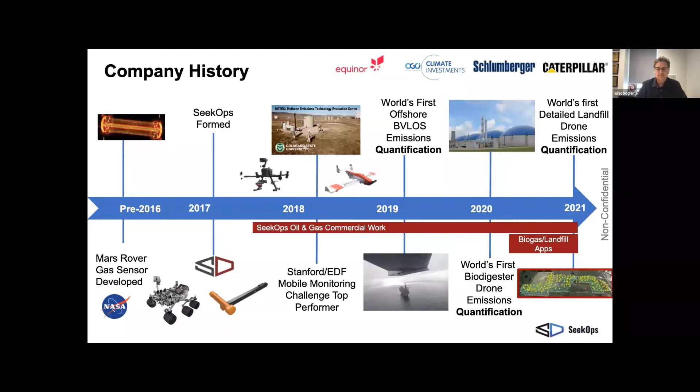The technology itself is a tunable diode laser tuned specifically to methane molecules, part per billion sensitive, and where and how we measure leads to around 2 hundredths of a kilogram an hour detection threshold when it's placed on a multi-rotor drone, which, as you can imagine, can get quite close to sources, obviously outside of any explosion-proof or intrinsically safe zones.

And then offshore with the fixed wing, because the fixed wing is a little bulkier, and we're certainly sensitive to the whims of the operators there in terms of staying distant, being unobtrusive to operations. We're a little further away, so the detection limit is about 2.5 kilograms an hour for that offshore. The units are self-contained. They have their own power, communications. They are very low power, so less than 2 watts complete, including the LiDAR as well that we use on

the multi-rotor for height. A lot of the engineering effort that went into the commercialization of this technology has really been to put it in rugged environments, high vibration, hostile, wide temperature range environments that typically optics don't like. Again, I think one of the benefits from coming from an engineering background like that of Schlumberger is a focus on process and technology development to ensure ruggedization, consistency in the field deployment and workflows.

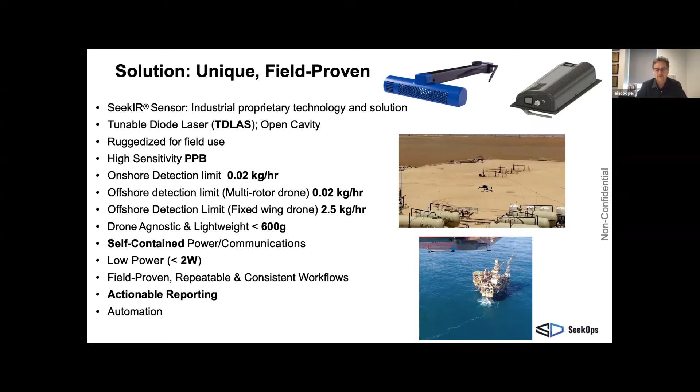And realistically, the DJI M300 is our drone of choice, but because of that independence on power communications, we are drone agnostic. But we keep a very close look on the automation capabilities and enhanced automation capabilities of these enterprise-grade drones so that we can leverage them.

We are also looking to put a BVLOS waiver for this site so that we can actually have a remote control center for the drone and prove out the beyond visual line of sight capabilities for the multi-rotor work, which will certainly enhance multi-pad capability for US land operations. And then also allows us to do a number of different things. So again, I think I have a little animation showing how we cleared the land. We've left it fairly complex with a few trees in place as well, so that we can have some hazards.

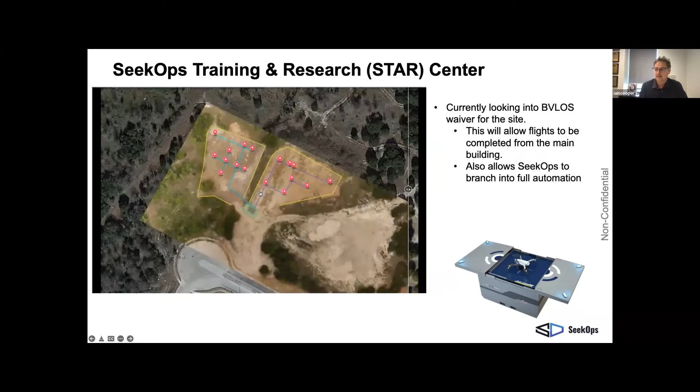This is also going to be a training center for pilots. Our business model is to partner with third-party drone service providers, train them, and then essentially let them deploy the sensor on our behalf. The flight paths we have are not difficult, but they're subtle, I would say. And again, I've got an example of that coming.

So again, this is the test center. It's going to have 17 release points. This was a photo from about a month ago. We've all, as you might imagine in a startup company, mucked in to help clear and set this out. We're going to have metered releases, but it really allows us to train, have videos for training, do customer demonstrations. We'd certainly love to put some long-term fixed sensors on there as well.

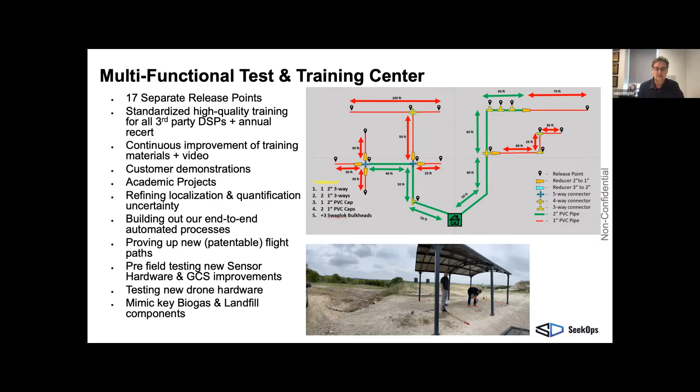It really helps us accelerate technology development, but realistically, more importantly, make sure that everybody that's going to be deploying our sensor is trained to the same standard as our own pilots and really understands the subtleties of the markets in which we deploy and the complexities, and lack thereof in some cases, of the flights that we do. And again, continue to build out the end-to-end automated workflow so that from invoice to report, the aim is to be fully automated. And again, this is a site that, offline, we can certainly discuss with Stanford the potential ability to use as well.

So we're in 4 markets today. Again, conventional oil and gas is the first of these. Traditional onshore, offshore, midstream. We've looked at and have done some test flights on P&A wells. Getting anyone to pay to look at some of the issues around P&A, frankly, has been an issue. And as a growing startup, we don't do anything for free anymore. But realistically, we'd love to certainly do a more in-depth study around the leaks from P&A wells.

Again, the sensitivity of our sensor lends itself very nicely to what we would expect are smaller leaks from those kind of wells. And again, I've got a little bit more detail on onshore and offshore. We've got four reasons people contract us for services. Again, the obvious ones are leak detection and repair. We call it leak detection and quantification as well as repair. We have partnered with a number of companies that do the downstream repair side of that contract, so that we can offer an end-to-end solution to the customer as well.

For the offshore, typically the interest has been around the platform asset level top-down reporting. And again, I think there's been a number of publications that you've probably seen, particularly around the work we've done with BP on that side, to compare bottom-up and top-down, and the differences that we see behind those numbers, which can be quite interesting in some cases. I would say offshore, the leaks we've seen tend to be a little smaller, as you might expect, particularly in the North Sea, where there's been fairly long-term scrutiny around emissions.

Rather than showing some schematics, and again, I'm hoping bandwidth works fine, I'll show a little video of a typical operation now. And I know Bob's certainly seen this before, but this is a fully automated survey. There's no one flying the drone here. This is a top-down view on a well pad in the Permian. We've actually got another drone above that's doing the filming. So the second drone there you see is just the shadow on the first. It's a very still day. And here we're doing orbits around, again, the wellheads here. The operator was quite surprised to see how dirty his wellhead was when he saw the video here.

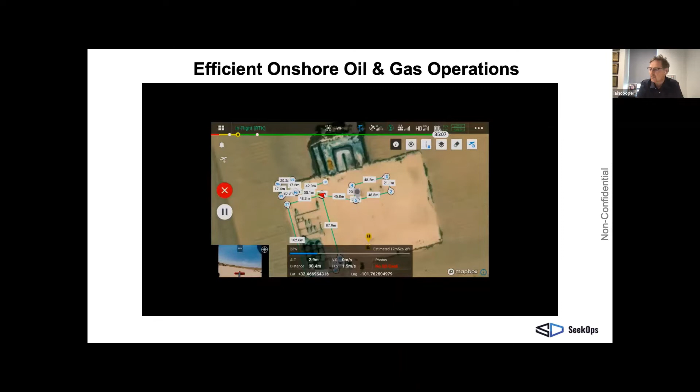And then this is the point of view of the drone. And again, this is all done using the real-time kinematics of the drone. So these have been waypoints essentially programmed in consultation with the operator on how they want their equipment groups monitored. As you can see, it moves quite quickly. It's very efficient, and certainly for us, from a leak detection, repair, and quantification perspective, it's very repeatable. Typically, when we go to an operation like this, we'll also set up high-resolution orthomosaic maps, which also enable us to use things like terrain following, but also give us detailed contextual information around the equipment that's on site at that time, also knowing that can evolve over time.

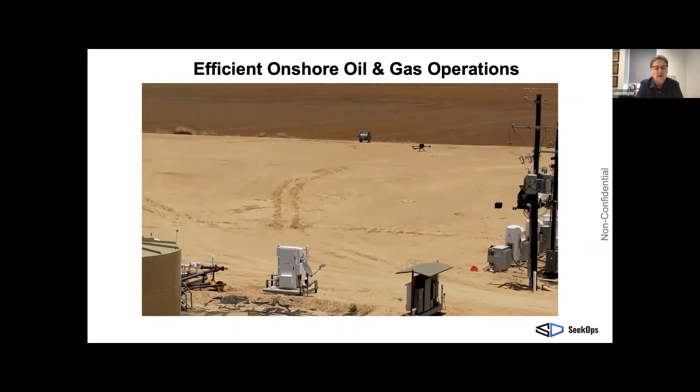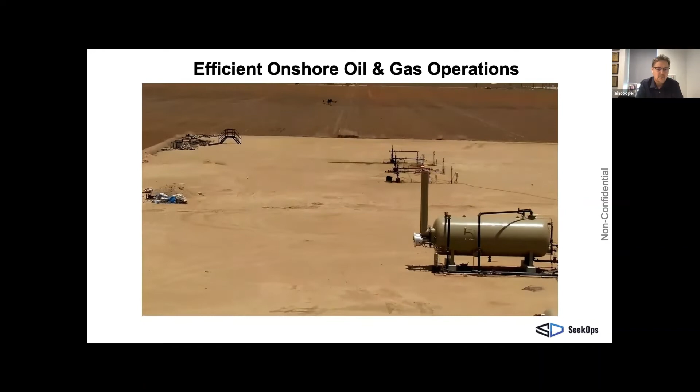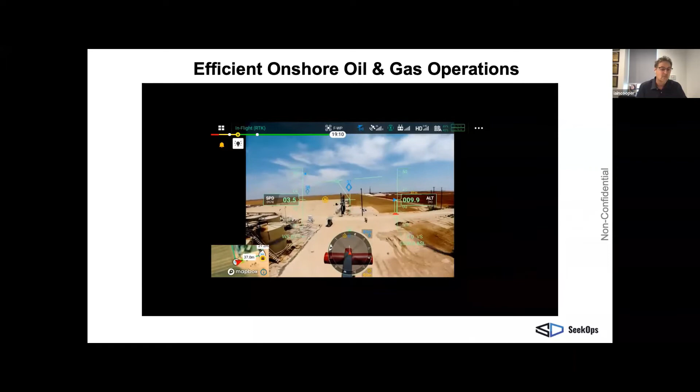The drones can typically fly in a light rain, but not heavy rain, because it's an open cavity sensor. We tend to get some fouling of the optics, as you might imagine. So we can certainly operate in a light rain. This is a typical data acquisition speed. We're acquiring data at 10 hertz while we fly. We're actually doing it a little faster, but we downsample to 10 hertz. It's very smooth, it's very efficient, and it's very unobtrusive. These enterprise grade drones are louder than you might get from Best Buy, but they're still really not very obtrusive at all from a noise pollution perspective either. One of the biggest issues we thought about from the biogas sector is, would it spook the cows? And cows being cows kind of look up once, wonder what it is, and then go back to eating.

So what comes out of that is a map like this and a report like this, where we'll highlight the variation in the wind and the enhancements that we've seen around those equipment groups. Typically the operator is wanting to have the equipment grouped together. On a good day, we might be able to find a leak from an individual component, particularly if it's something like a thief hatch left open, or a very obvious leak from a separator or a wellhead. But typically we group it by equipment group. And depending where we are, we'll give it in standard cubic feet per hour or kilograms per hour. We don't overfly any equipment. One of the benefits of the drones is that we can make sure that we don't overfly equipment or personnel.

We typically take a measurement of the background. As you might imagine on a biogas site or an oil and gas site, you do have an elevated background. And so, because of that part per billion sensitivity, we're looking at enhancements above the background. So we fly, whether it's downwind curtain patterned interlaced curtains or orbitals at interlaced heights, and we can get the high resolution curtains around the equipment by which we can ascertain and triangulate essentially where the leak is coming from, and then convert that to the leak rate with the wind.

Right now we have an anemometer on location, but we're starting to use wind on drone measurements as well. As you can imagine, having GPS, wind, and concentration on location helps refine that uncertainty even more. Occasionally we will revert to manual mode, particularly if we've got widely ranging wind directions changing significantly during the acquisition time. For a site like this, typically to set up, do the orthomosaic imaging, and then do the survey setup and survey is about an hour.

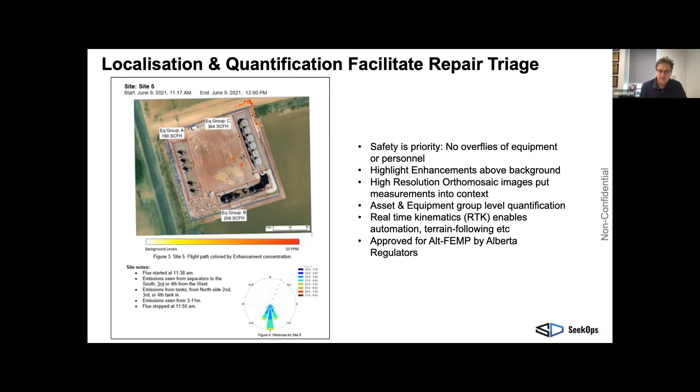But it says emissions limitation in the EPA equivalent of that. We know EPA is kind of on hold while they're looking at the new regulations, but emissions limitation is not straightforward. So we had a Permian independent operator have us fly an automated repeat survey after they effected the repairs. It took 3 months for the repairs. As an operator, they've been very open. We actually have a paper accepted for the SPE ATCE, where we'll talk in more depth about the workflow and the subsequent events here. In most cases, the repairs were effective, and we did see a significant decrease in emissions, as you can see on the table here. But in some cases, when we went back, we saw significant enhancements as well.

We typically take detailed field notes. We know that contextual information and ultimately that unstructured data for things like machine learning will be important. So we recommend and train our pilots to take copious notes with keywords. And it was subsequently confirmed by the operators, yes, they had unlit flares on 2 of those sites. There's a number of studies going on now looking at flare efficiency. So context is everything. You can fix the repair, but if you don't light the flare, then your emissions could well be higher. So that operational context is really important, particularly on the land operations we've seen.

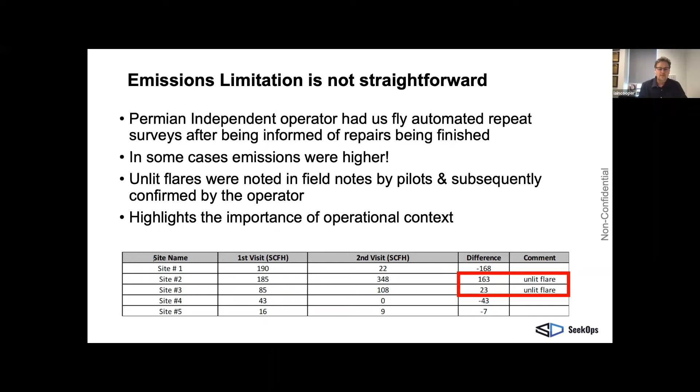If we move offshore now, we've got 2 approaches. The first is what we've published a number of times on the fixed wing. This is beyond visual line of sight, typically launched from shore, goes to the offshore platform, and performs what I call the beehive model. We encompass the emissions around the platform with that fixed wing plane, it spends about an hour on location, and then flies back. About a 600-kilometer round trip. Most of the work to date has been in the North Sea. I think we've done 6 operators, just under 20 flights to date there. We've already got about 120 flights scheduled this year, so that's rapidly growing and beyond the North Sea now. So we see this as a very useful technology at the asset level. But of course, people typically want more information than that.

So we've also been working on the deployment of multi-rotor drones, obviously much closer. In a post-COVID world, it's much more difficult to get onto a platform unless you're truly revenue generating. So we've looked at deploying from supply boats. There are some operators that still would like deployment from the platform itself. And certainly you can envisage drone resident systems being one of the long-term approaches here, particularly triggered by fixed or IoT sensors as well.

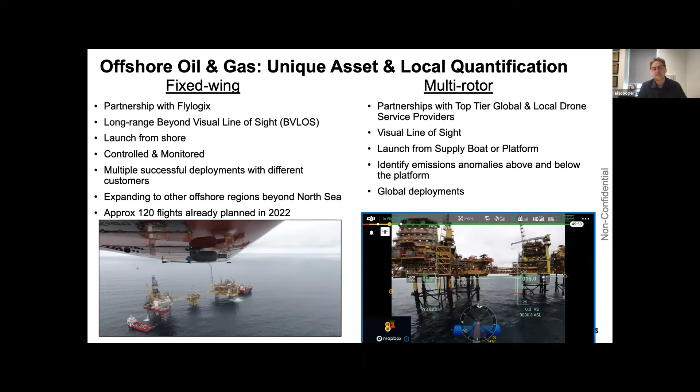In this case, we're doing it line of sight, launched from the supply boat. Here we can get a bit more granularity on potential leaks, locations, and in some cases, emissions above and below the deck level of the platform, which is quite interesting for things like cold vents as well. We've done this globally. And the more operators we talk to, the more they're starting to get comfortable with drones in the offshore environment, close to platforms.

So renewable natural gas is the other, I would say, second of the key markets that we've seen rapid growth in, and again, certainly sales cycles have been a lot shorter in the renewable natural gas market compared to oil and gas. What to me has been interesting here is that almost every part of their value chain has been leaking, and the regulatory thrusts have been perhaps not as focused on this area as they have in oil and gas and even landfill side.

And that was one of the reasons we reached out and wanted Harmen Dekker, the head of the EBA, the European Biogas Association, to really help us understand this market and its evolution. And certainly post Ukraine invasion, with potential supply restrictions in the EU, we've seen even faster growth and acceleration in wanting to build more biogas facilities.

So biogas, biomethane. So you may hear them used interchangeably. Biomethane is effectively upgraded biogas. Biogas is typically a 50-50 mix, or thereabouts, of CO2 and methane with a few other species. As you might expect, it comes from a range of organic matter, whether it's solid waste. We've done a lot of work on dairy farms. You can imagine wastewater as well.

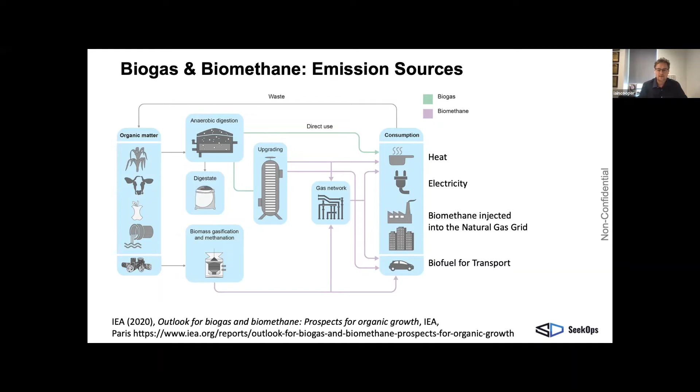I would say Europe is slightly ahead of the US, and I've got a little comparison on the markets here. Right now, there's about 2,300 operational biogas systems in the US, but there's rapid growth expected and being funded. Companies like Brightmark have had significant investment from Chevron. Most of the major operators are certainly experimenting or getting into this market fairly aggressively. And so it's really another string to their bow in terms of access to gas, but also access to the carbon credits that come with that as well.

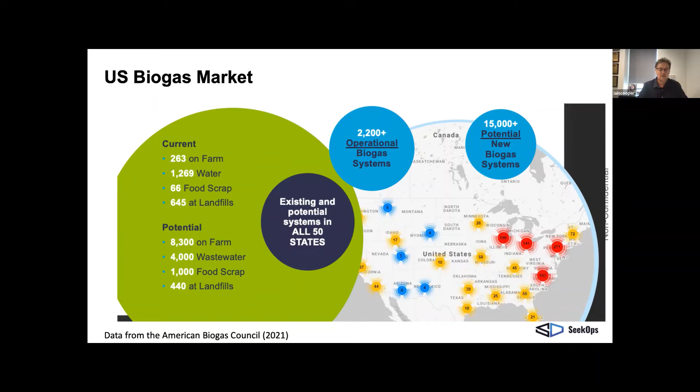So keeping product in pipe is incredibly valuable to any of the biogas producers. And they've previously done very little in terms of monitoring, whether it's optical gas imaging cameras, or just ensuring that the construction is built to certain emission standards. And in discussions we've had, post commissioning of any system now, emissions are going to be a key part of that commissioning, because any repairs can also be effected under warranty. So emissions will be an important part of construction in these markets, but will also be assessed across that whole chain, including things like the process digestate and ultimately how that's handled.

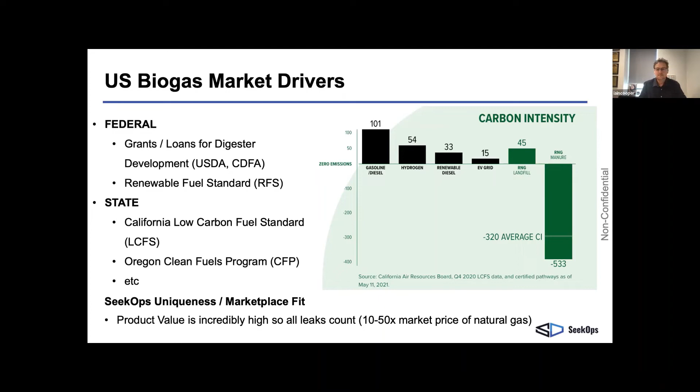On the EU side, they've certainly had a bit of a head start. There's about 19,000 biogas plants, I think 11,000 in Germany alone. And discussions we've heard around biogas growth are that they're going to continue to build. Expectations are that up to 40% of the total gas consumption will be biogas in the EU by 2050. So this is a rapidly growing and important market, and an important contributor in terms of emissions as well.

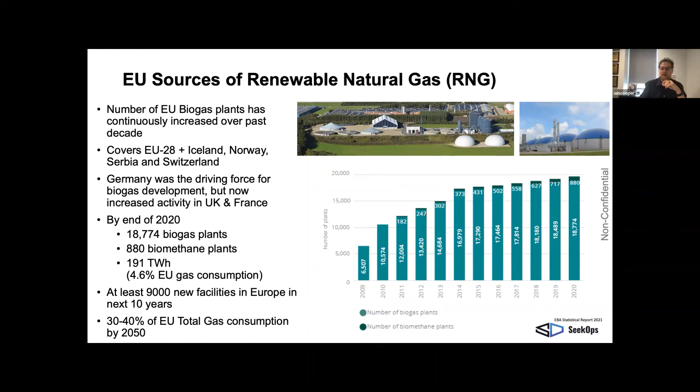So for a typical biogas facility, we do the same kind of approach: high resolution orthomosaic images, and then we look at the components. Obviously, the components are a little different. There's the pre-processing side. There's the digester.

In this case, in this image, this is a concrete digester. So that's this part over here. It's a flat concrete surface where, for want of a better word, the poop is mixed underneath, and the gas is then taken off, taken over to the gas upgrade system over here, and then the effluent is separated and put out into a pond here, which also emits methane quite significantly.

Interestingly, in this case, we actually found one of the leaks was downstream of the flow meter. So what they thought they were getting wasn't what they were actually getting. And again, with the drone, you can get quite high resolution here. This is a fairly small site, but not atypical for a biogas facility in the US.

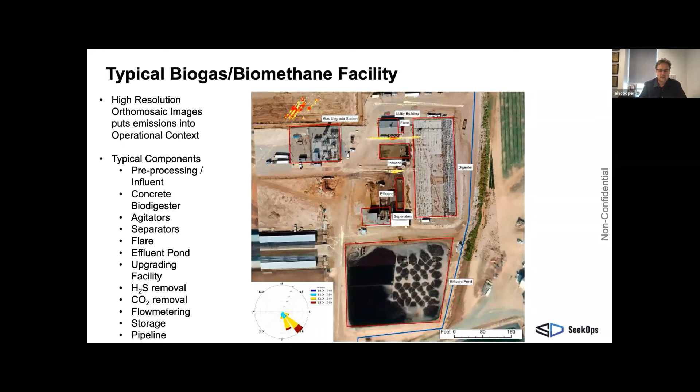Again, biogas is ideally suited to drones. I think I've got a little video here that shows how we go. Again, we leverage the automation. Again, all this is done in coordination with the operator here. Safety is paramount. So the first part of the day is all about the safety briefing, particularly on these kinds of sites that maybe haven't had the same kind of scrutiny or level of safety focus that oil and gas has had in the past.

We've done a number of sites now, US, EU. Again, every one is slightly different here. Certainly it's less cookie cutter compared to a set of well pads in the Permian, for example. Typically, again, it's leak rate and leak location they're wanting here. And in one case, we actually had to stop them following us around with a wrench to try and fix things behind us as we spotted the leaks, just so that we could get at least that site level quantification.

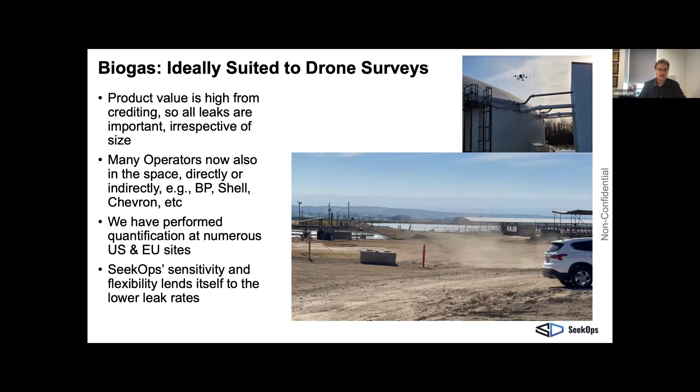The rates tend to be a little lower. I think the leak on this site was about 50 scfs per minute. So again, not insignificant, but certainly smaller than typical large-scale oil and gas operations. As I mentioned, we get leaks from almost every part of the process.

So here again, this is a concrete digester. What happens is you tend to get methane that bubbles up underneath the concrete. And so you get these little blisters, and then the gas comes out right there. And so we've highlighted again some of the leaks here with the orange flares coming out of those blistered leaks that we've seen here.

In this case, with a hot zone approval, we actually went in very close, took the sensor off the drone, and used it in handheld mode. Again, it's important to get that hot zone waiver. It's a very low powered enclosed device, but it is not intrinsically safe. But the operator felt comfortable enough letting us effectively wand some of these issues.

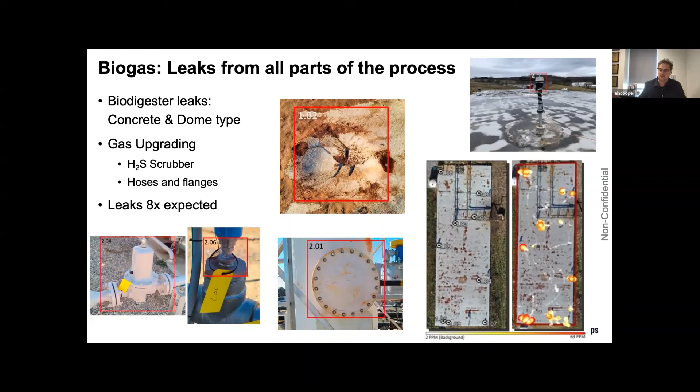So again, we saw the H2S scrubber leak, many hoses and flanges, and again, their expectations were dashed, frankly, and we found the leaks were about 8 times higher than they were thinking. And again, broadly across that whole workflow as well.

Again, not insignificant. This is another example where the effluent itself was only just above that of the biodigester in terms of leaks. So the leaks here are in the order of hundreds of scfs per hour. If you compare that, these are the kind of leaks that you'd certainly see by satellite as well. So pretty significant.

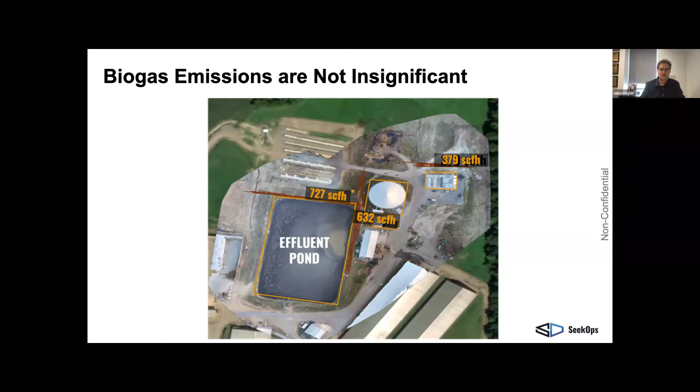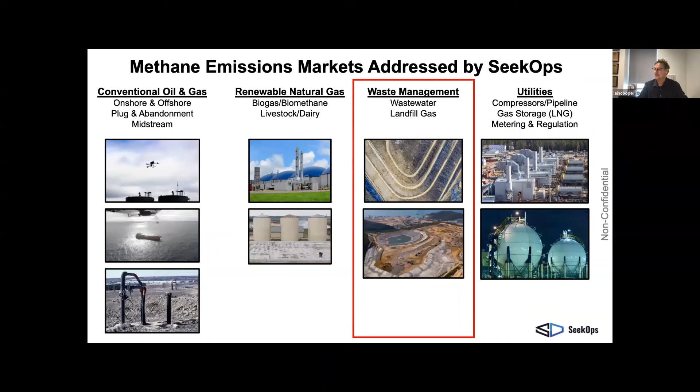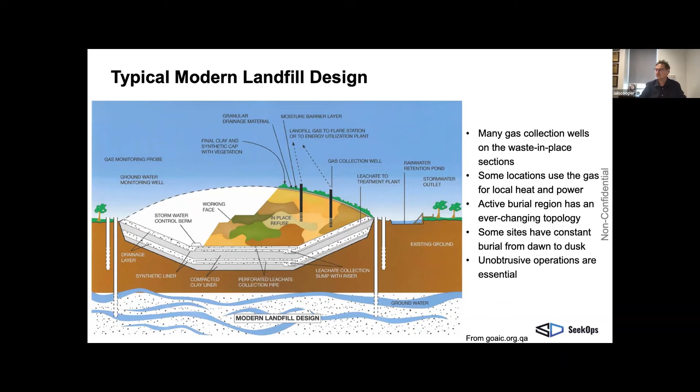And then you've got the active burial region, which certainly changes daily. It is truly ever changing. We did some work in a landfill not too far from where we are, and trucks are coming from dawn till dusk. They're continually trying to bury in the landfill, and so you've got these different rates of burial, different ages of the buried material, which leads to an evolution across the landfill site in terms of the leak rates.

So the traditional survey today for a landfill site is a walking survey. This is someone with a handheld sensor that walks a few inches above the surface. The grass has to be mown. As you can see from that image, it's not the most lawnmower friendly. It's expensive for a site that's a few hundred acres, and with that level of complexity, with gas collection wells at regular locations, to mow.

Clearly, one of the benefits of a drone is, one, you're not employing someone to do what is effectively a fairly nasty job. Two, you don't have to mow the grass. Three, you can get very close to the collection wells, again, with the sensitivity of our sensor. And you can also leverage the terrain following modes of these drones to automate the process.

On this particular site, the one area we actually had to fly manual was where there were some trees near the entrance to the site. From an aesthetic point of view, we just didn't feel comfortable setting a drone that would go over the car park, so we flew it manually, essentially behind the trees. And also, as in the oil and gas side, it facilitates those repeat visits. And again, we've had conversations around the landfill site.

Ideally where they'd love to evolve is drone in a barn, be able to deploy daily. And we've even seen diurnal cycles, depending on the rate of active burial on these locations. What's also interesting here on the landfill side is many of these landfill operators are looking to essentially harness the product that they have within the landfill. So they'll be looking at putting upgrading units on these facilities, very similar to biogas, and producing biomethane from that.

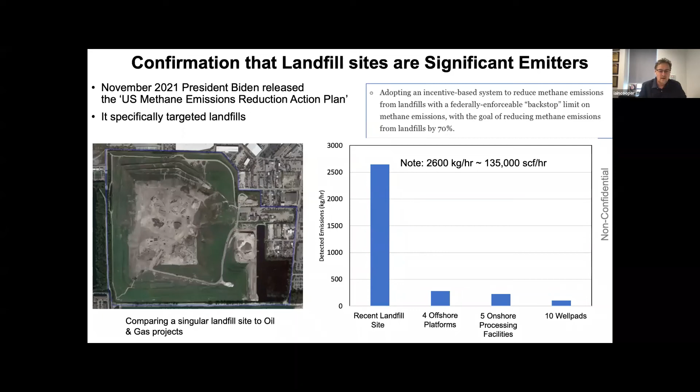So again, in summary, I think drones have proven themselves now very useful, both fixed wing and multi-rotor, for onshore and offshore industrial facilities. And again, I've not just said oil and gas there. We can do direct measurements close to the source, and again, it's really as close as you're comfortable, or as close as safe. Again, safety is the #1 concern.

Of course, we see large leaks, but I think where we've been targeting and what we've highlighted are those more insidious, difficult to access or difficult to identify. Where we've done follow-up with an optical gas imaging camera, even a trained, seasoned OGI operator has sometimes struggled unless they get in exactly the right position to see some of these leaks. And these are the leaks that can go unnoticed for years. And when you've got 100,000 of these, that's a significant contributor.

So while the story is big leaks contribute to the bulk of emissions, once those are found and fixed, you've got to find the small ones as well. We have seen swift and targeted remedial action. Again, one of our cases, the well pad was actually rained out, so they couldn't get out there for months and would have gone without fixing these leaks. So again, operational context, really important.

We continue to understand the 3D nature of these emissions. Again, as a kind of atmospheric scientist, the planetary boundary layer is very complex. You've got convection currents, you've got heat and moisture fluxes that can all contribute to the plume dynamics. You've got vortex shedding around some of this equipment. So being able to encompass the plume can be quite tricky. And again, a drone gives you that ability above and beyond a fixed sensor to really address that inherent 3D nature of the emissions.

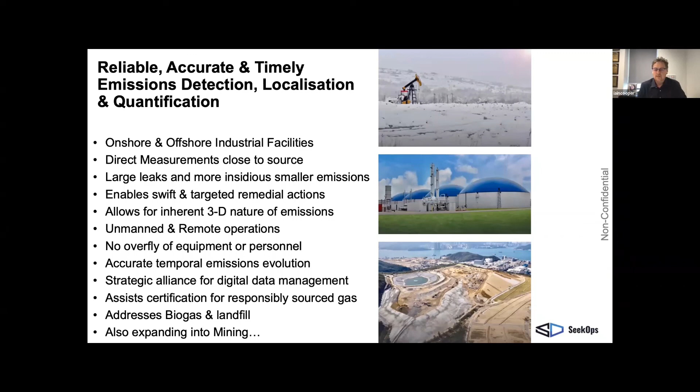So with that, I wanted to leave some time for questions. I think I had just a title slide at the end there. Again, the sensor itself is about 6 inches long. It's 600 grams, so it's very light. Again, if we were to make that truly intrinsically safe, it would add a lot of bulk and weight to it. But yeah, we've certainly seen the value in using it in a handheld mode with the appropriate waivers.

And with that, I'll open up to questions.